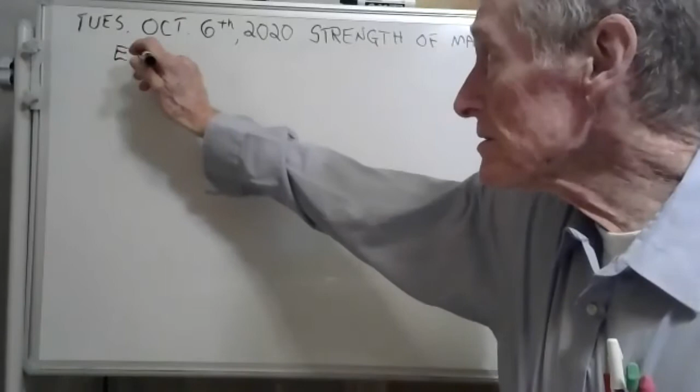Okay, your exam is on chapters 13, 14, and 15. I think we start on 15 today. I believe that's right. And let me look and see here. Yeah, I think we start on 15 today. Yeah, oh no wait a minute, that's crazy.

No. I'll get this sorted out here in just a minute. No, chapters 3, 4, and 5. Not 13, 14, and 15. Chapters 3, 4, and 5. Yeah, that's better. And it'll be available September... well, not September. It'll be available October 15th.

It's available, and it's due Sunday, October 18th, over chapters 3, 4, 5, and we start 5 today. Yeah, now Darren, did that answer your question? Yes sir, thank you. Great.

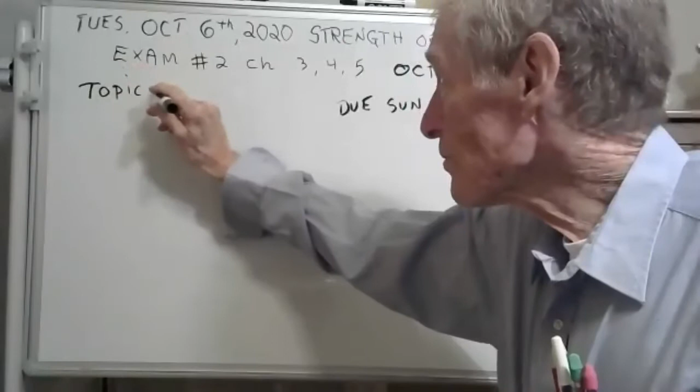But we're going to study chapter 5. Today the topic is torsion. Is that what they say chapter 5 is? Let's look up chapter 5 and see what it says here. Yeah, how about that, that's the name of the chapter, torsion.

Be nice to know what torsion is. All it is is just an external twisting. It's an external moment, and that causes a body to twist through an angle.

See, torsion is external, and torque is internal. Torsion is external, torque is internal.

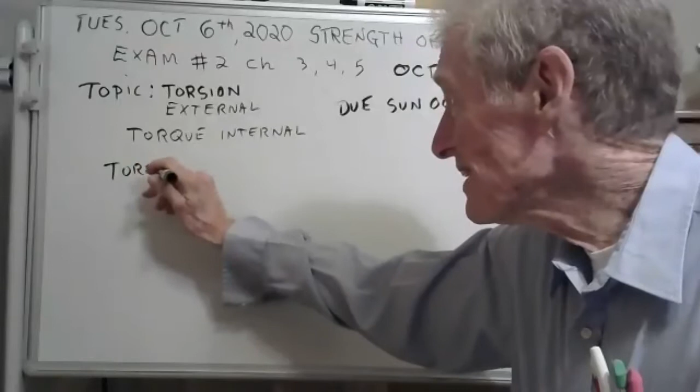Probably the most important equation in our chapter is called the torsion formula, and I'll show you where it comes from here in a minute. And it goes like this. And I'll try to explain what those different symbols mean.

Of course, you know what that little tau stands for. Here, let me ask one of my excellent students. How about my friend Samuel? Unmute and say hello, please. Earth calling Samuel, come in Samuel. Hello, hello. Hey Samuel, what's that little Greek letter tau represent? Shear stress, he's got it, he has got it, that is shear stress.

And Samuel knows that this whole course is all about stress. Stress is where it's at. It's the most important concept because, see, stress causes things to fail. Stress causes problems, and this is called shear stress.

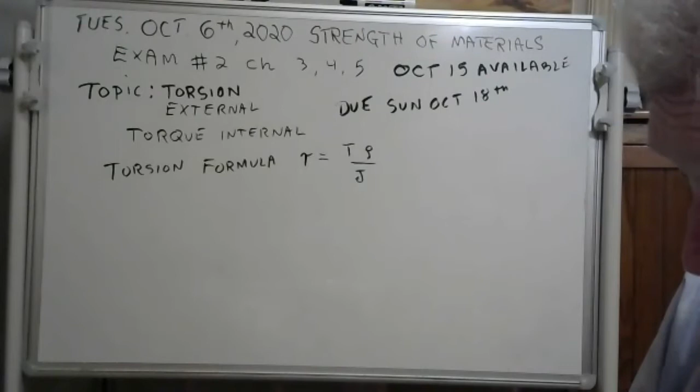And it's equal to torque times this little Greek letter rho, which represents the distance from your centroid, or you could think of it as your center of mass of your body. And this thing here is called your polar moment of inertia, but we'll get to that in a little while.

So that's for sure one of the big concepts that we're going to study. But let's see how we can get at this torque here. Let me find you an example of torque. Let me shop around here.

Okay, well here's one here. This will work. This is problem 5-7. Let me make a little room here.

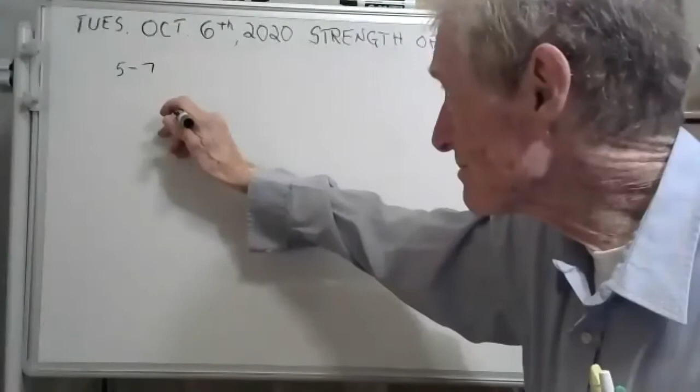But this is 5-7, and they've got a circular rod here, and it has, looks like, some gears actually. These are gears, and they represent an external torsion. There's an external torsion on those two gears going like that. This one's 300 Newton meters. This one is an external torsion of 600 Newton meters.

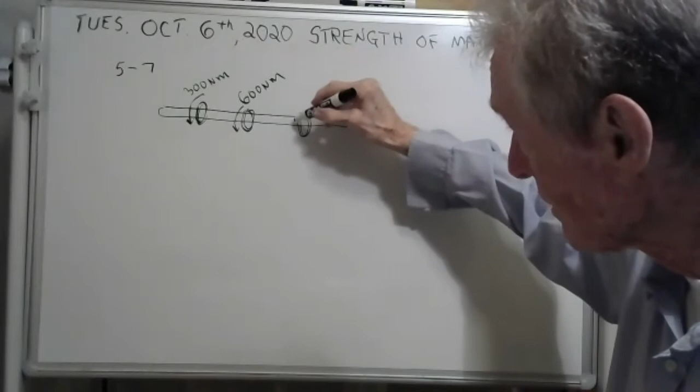Now this one, it looks like another gear right there. It's going the other way. They didn't tell you what it was. Just a minute, let me read this.

Shear stress in the shaft, determine the radial line. Oh yeah, they told us that T1 is 2,000 Newton meters. And then finally, there's another gear here, and it's got 900 Newton meters. But see, this is connected to a fixed connection, and it can provide an external torsion.

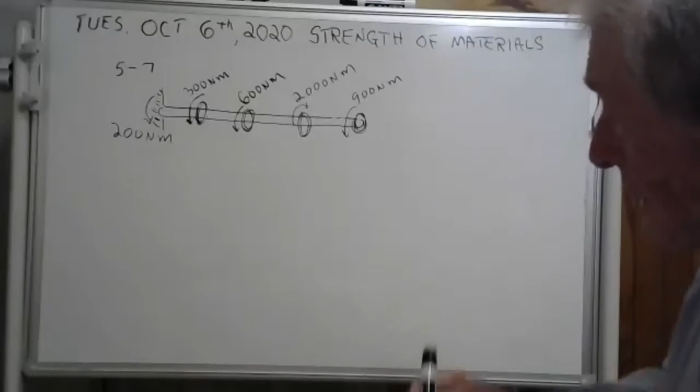Gee, I don't know, my brain is mush. I'm going to add them up. 200 and 300 and 600 and 900. Yeah, yeah, we have equilibrium. See, these aren't forces though, they're twists, they're moments. See, the sum of the moments have to be 0.

Now they call these things torsions. See, torsions are external. But see, in the torsion formula, the shear stress is given, maybe you don't understand that formula yet, but you will. It's given by the torque. We've got to get the torques.

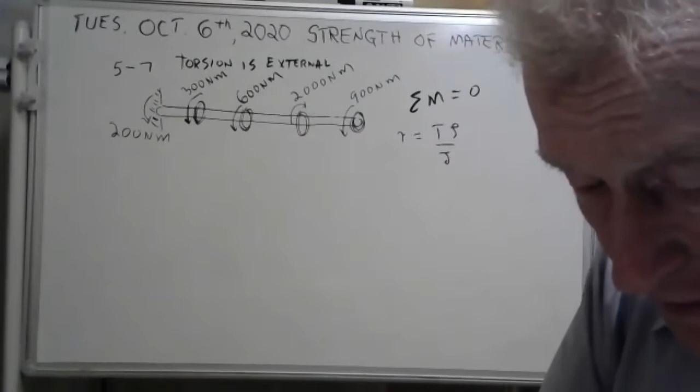Now, I've got a better way of expressing these torsions, and that's using double arrowheads. I don't think the book does that. But see, if you twist something that way, you're going to have a double arrowhead going to the right of 200 Newton meters. Now if you twist something that, well that's the same deal. This is going to have a double arrowhead going to the right.

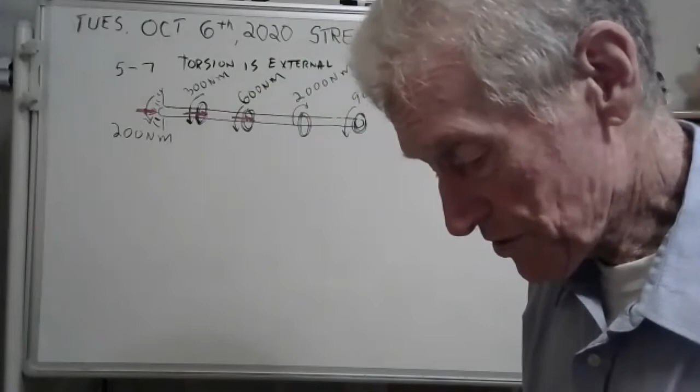And this one too, holy cow, all three of those, they've got a double arrowhead going to the right. But now this one, see, if you want to know which way it goes, just think of a right-hand screw. You know, righty-tighty, lefty-loosey, right? See, if you take and you turn a right-hand screw like that, it will travel that way.

See, so this one's got a double arrowhead going to the left of 2,000. Now this one, we're back to a double arrowhead of 900 going to the right. Okay, well do you understand that this is a superior way of doing these torsions?

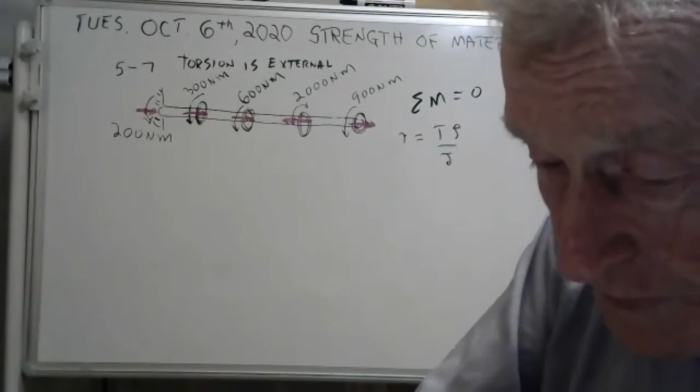We're using double arrowheads, and now we can do our torque loading diagram. This is going to be the torque loading diagram. And remember now, torque is, it's not external, it's internal. And so we're going to do the torque loading diagram. Okay, and this will be torque, and this will just be an x coordinate going to the right.

And like with all loading diagrams, what you do is the same thing we did with the normal force. To make a loading diagram, they're all alike.

They're all alike. Let me go to one of my excellent students here. How about we pick on Mohammed? Mohammed, unmute and say hello, please. Hello, Mr. Griffin. Hello, Mohammed.

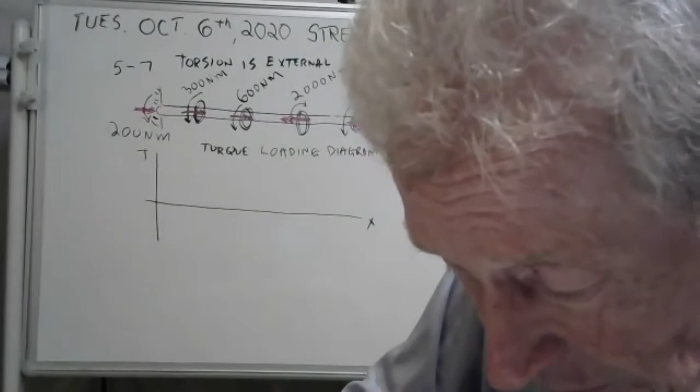Mohammed, do you remember how to make loading diagrams? What do you have to do to make a loading diagram, Mohammed? Normal loading diagrams, we cut the beams into sections and find the internal forces.

Mohammed's got it. You have to make a section. Now, the agreement is you always do a left-hand section. So see, you sectioned it in here. Here we go, forget about everything to the right because we're just looking at that left-hand section. Can you see that you're going to have a double arrowhead going to the left there of 200? So I'm going to make it 200 negative because it's going to the left.

Now we're going to section it in here. Can you see you got 200 and 300 going to the right? So you're going to have 500 going to the left. This jumps down to 500. There, negative 500 Newton meters.

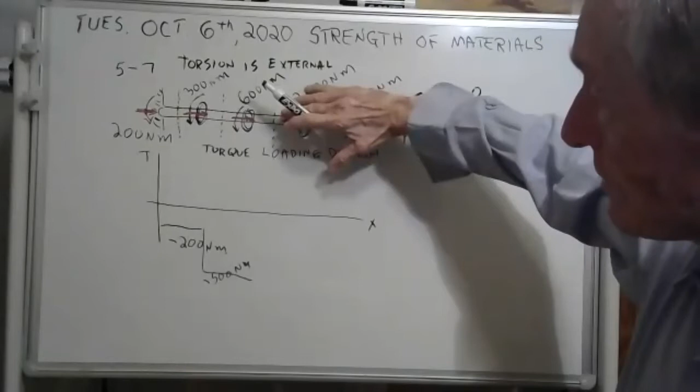Now we're going to section it in here. And you got a 200 going to the right, 300 going to the right, 600 going to the right. That makes 1100. You've got to have 1100 going to the left.

So it goes down to here, way down there, way down low. Does that even show up? Yeah, that shows up. Okay, that's negative 1100 Newton meters.

See, we're plotting torque. This is called a torque loading diagram. And then what do we do? Well, if you sectioned it in here, we've got 1100 going to the right, 2000 going to the left.

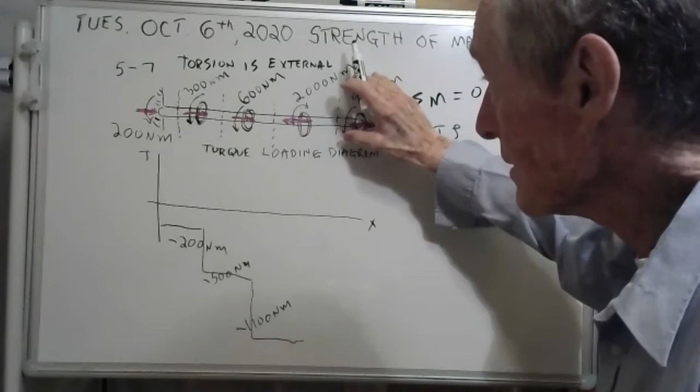I'm going to section it in here. I've got 500, 1100 going to the right, and 2000 going to the left. So that's a total of 900 that I need going to the right, a total of 900. So that means in here you've got to have 900 going to the left.

So this pops up to 900, right about here. And that's a negative 900 Newton meters. Is that right? Let me think about it. Wouldn't that be a positive 900?

Yeah, you're absolutely right. Now, who said that? Where'd that voice come from? Ben Harris. We'll give Ben a nice big fat thank you point.

We got to travel up 2000, Ben, and that puts us all the way up to about like that. I was wrong. This is a positive 900 Newton meters. And now, to make it pretty, we can color it in, make ourselves a nice torque loading

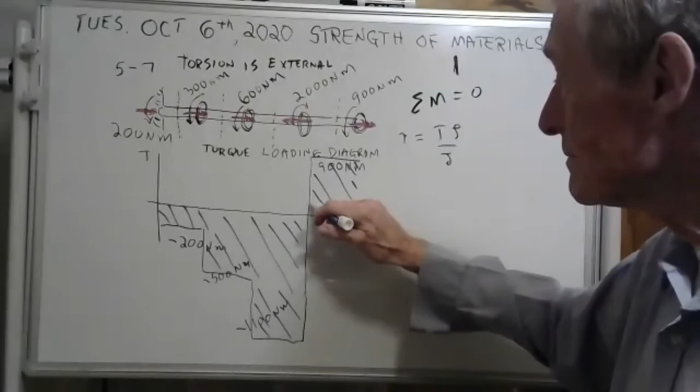diagram. We'll make it pretty. Ta-da! You're looking at it. You're looking at a nice torque loading diagram. See that right there? That's torque, that's internal.

These red things here, these are torsions. They're external. My students can get confused on this, like for instance, you look here and see a 300 Newton meter and think, well I bet that's what I need in this equation, 300 Newton meters. There is no 300 Newton meter anywhere on this diagram, is there? Nope. You see that 600 Newton meters? There's no 600 Newton meters on this diagram either, is there? No.

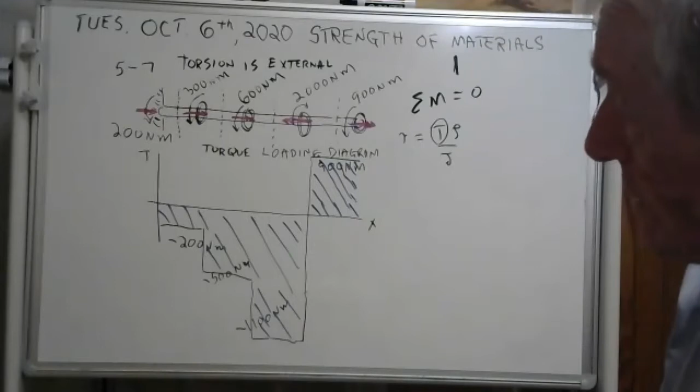So that's how you do it. It's exactly the same process that you use with your normal force loading diagrams. Did you know there are 4 kinds of loading diagrams?

Is there any question on any of that? You're okay with it? All right, well here, I'm going to list the 4 kinds of loading diagrams. Did you know there are 4 kinds of loading diagrams?

Now, on your homework, if you don't do the loading diagram, what's going to happen to you? You don't get a 4. That's what happens to you. I want the loading diagram.

Now let me go to one of my excellent students. I'm going to go to Julian. Hey Julian, unmute and say hello.

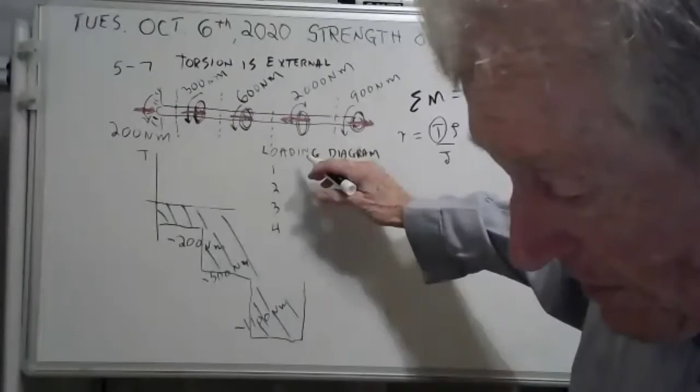Hello. Hey Julian, do you know any of the different names for the loading diagrams? Give me some, go ahead. I'll write them in here. Julian, go. Ooh, torque, yeah there's one. There's good going, Julian. Crazy, good going. There's a torque loading diagram.

Julian, can you do another one? Shear, there's a shear loading diagram. Excellent, I think Julian maybe has been listening to me. Give me another one.

Uh-oh, we're drawing a blank here. Is there? There's 2 more. Isn't it funny when you're asked something, your mind just goes blank? Yeah, I don't think I can think of the other 2.

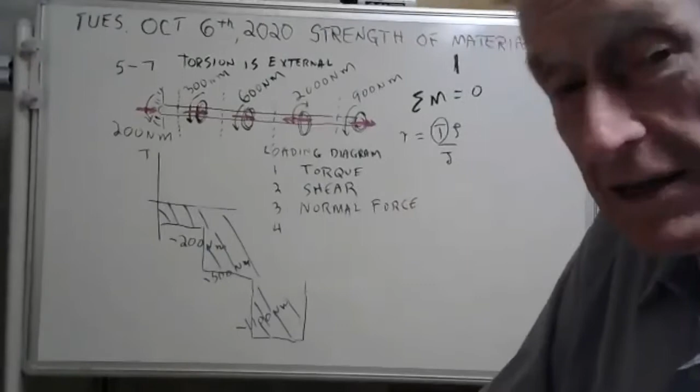Well, you've done some. There's one called a normal force loading diagram. Now, can you think of the last one? No. That's all right, you're not alone. There's some others out there. That's why I ask you this stuff. It's called the bending moment loading diagram. There's 4 kinds of loading diagrams.

Now, you've done these normal force loading diagrams, but these torque loading diagrams might be new to you. But good going. Okay, well let's attack this torsion formula, shall we? Any comments or questions from anyone?

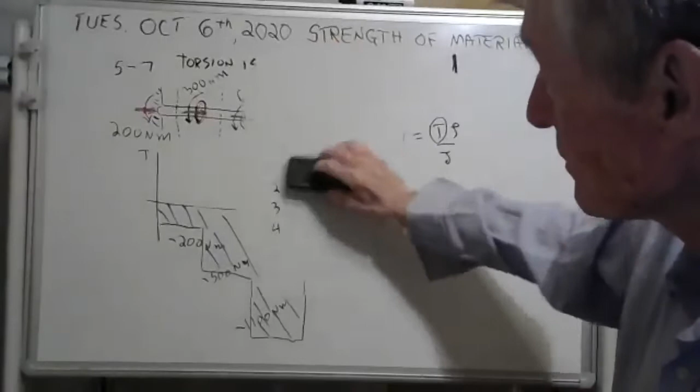Okay, now the topic is this, probably the most important equation in the chapter. We're in chapter 5, and the topic is torsion.

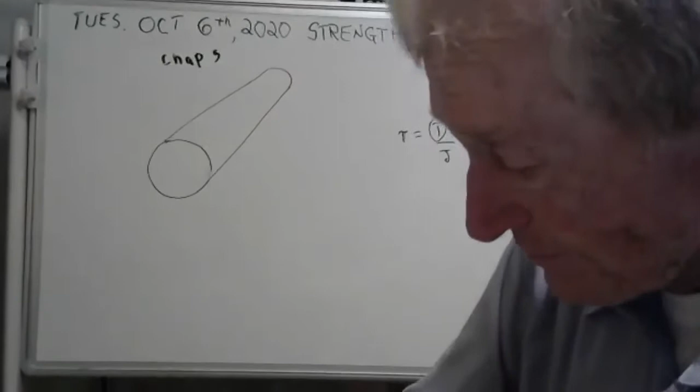Let's say you had a rod, okay? We're looking at the cross section here, and this rod goes way back here someplace. And let's say somebody is going to twist it. First, before we twist it, let's put a stripe right down the middle. There we go.

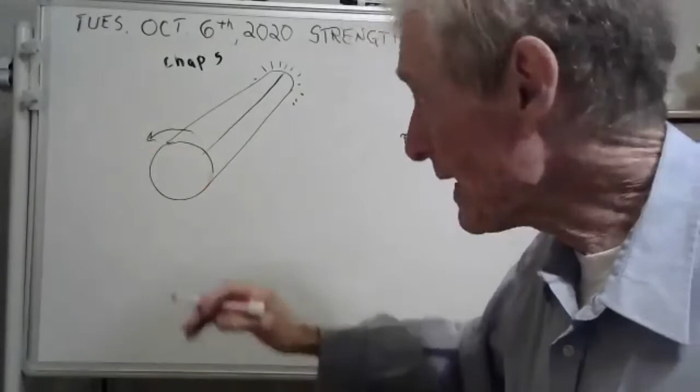Now we're going to twist it. Somebody's going to come along and put some torsion on it like that, twist it like that. Of course, this other end needs to be attached to a wall or something where it can't turn—it's going to stay put. But another way of writing that is with a double arrowhead instead of writing the torsion like that.

But where do I put my arrowhead? Let me go to one of my excellent students here. Shane, unmute and say hello, Shane, please. Earth calling Shane, come in Shane. Uh-oh, maybe coffee break. Samuel, unmute and say hello, Samuel.

Hello, Samuel, I need to put a double arrowhead on that. Can you tell that's a red? Yeah, you can sort of tell it's red, isn't it, Samuel? Now, Samuel, where do I put my double arrowhead? Which end do I put my double arrowhead on, Samuel? Like coming out of the board. Yes, good going, Samuel's got it. By Jove, he's got it.

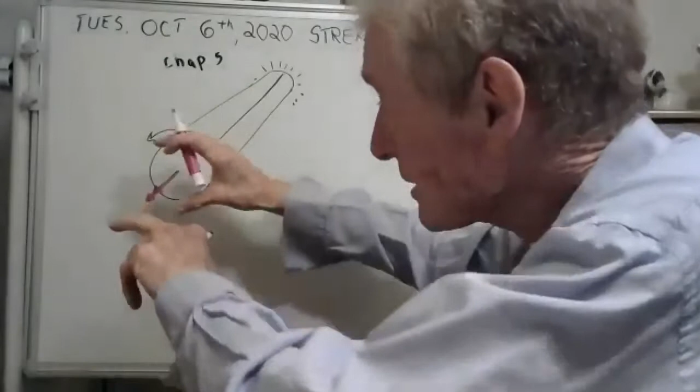See, if you twist something like that, well, what do they call that? Counterclockwise. If you had a screw or a bolt or a nut, if you twist it like that, it comes out. It's lefty loosey, righty tighty, isn't that how it goes? And if you twist it this way, the right hand rule or a right hand screw will come out of the board. So there you have it.

Good going, and here's what's going to happen. This line here that I drew along my rod, it's going to kind of move over a little bit. It probably doesn't curve like this—let me try that again. It's going to come over here like, yeah, maybe like that. Yeah, there you go, that kind of makes sense.

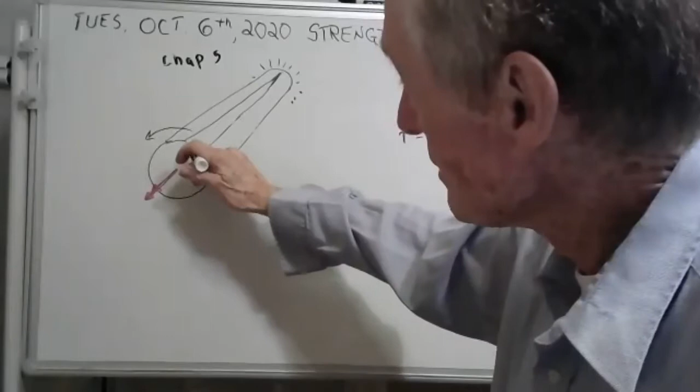If you twist it, that line that I drew on there to start with has been kind of shifted over a little bit. And this distance right here is equal to—if you said this distance here is a radius, or in this case we'll call it rho, and it's an angle theta there. Maybe d theta, or I guess theta—make it theta, there you go. This little distance here is rho times theta.

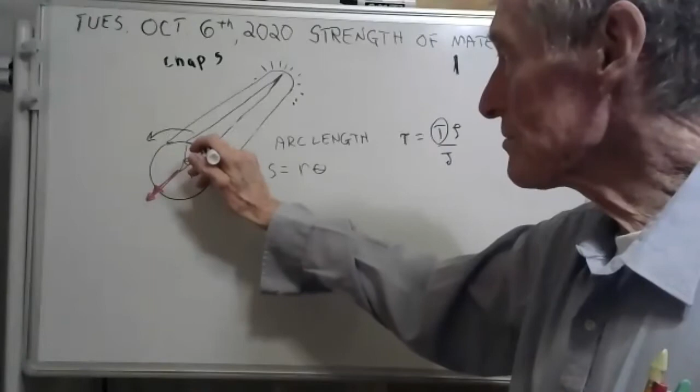Remember, what do they call that? The arc length, a formula that we all know and love. You can make that an R if you wanted to, but it's that little distance there, S we could call it, from here to here, that it's been moved, is equal to r theta. S equals r theta, that's the arc length formula.

If you call this distance x going this way, then the normal strain—remember, normal strain is deformation over length. So is shear strain; shear strain is deformation over length. But the difference is, with normal strain, these are parallel. The deformation and the length are parallel.

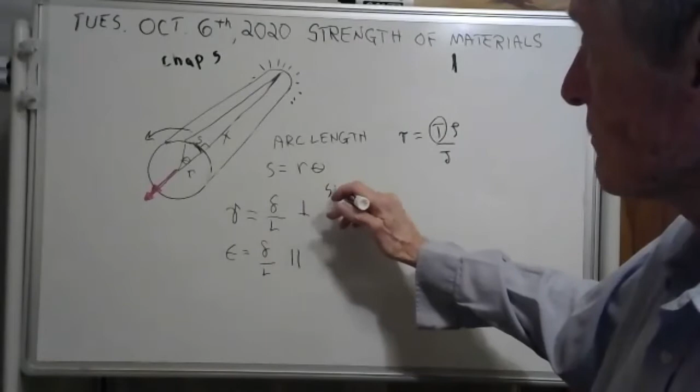But with shear strain, the name of that is a Greek letter gamma. It's shear strain—the deformation and the length are perpendicular. See, these are perpendicular. Here's your length, x, and here's your deformation. There's a perpendicular here, I'll draw it for you. There you go, see the little perpendicular in there. Those are perpendicular, whereas these are parallel. So the shear strain, here, I'll write it out for you. It's called shear strain.

We've studied shear strain before, there's a formula for it. It's a form of Hooke's law, where this is your shear stress, this is your modulus of rigidity, and that's your shear strain. Just like this formula here is another form of Hooke's law, where this is normal stress, modulus of elasticity, and normal strain.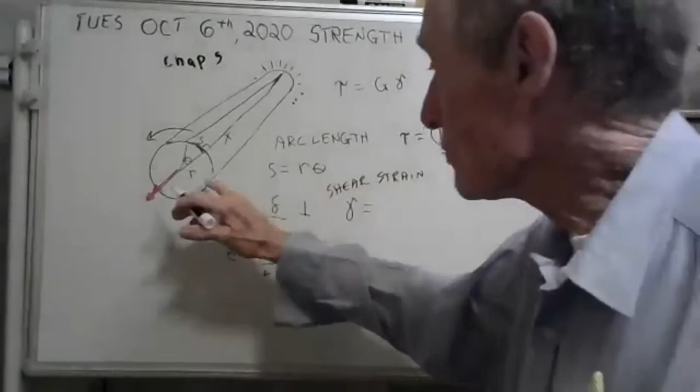Right, we know that. Well, we could just write this as... I think the way they write it is, rho can be any distance in here from the center to whatever point you want to talk about. If you go all the way to the end there, that would be the radius. But this would be rho d theta dx. That's your shear strain, rho d theta dx. Now let me see if that's in your book or if I'm making this stuff up.

Let me dig around and see here. We're in chapter 5, for anybody that just tuned in and wonders what we're doing now. I see that equation, it's on page 185. Only they use the symbol phi instead of theta. That's okay, it's just a dummy variable. They said d phi. There you go. Yeah, that equation is on page 185.

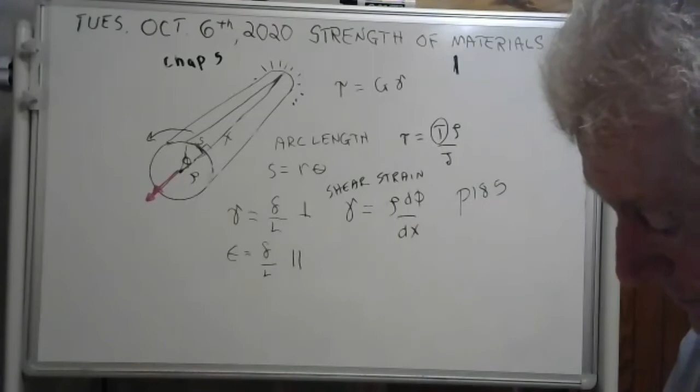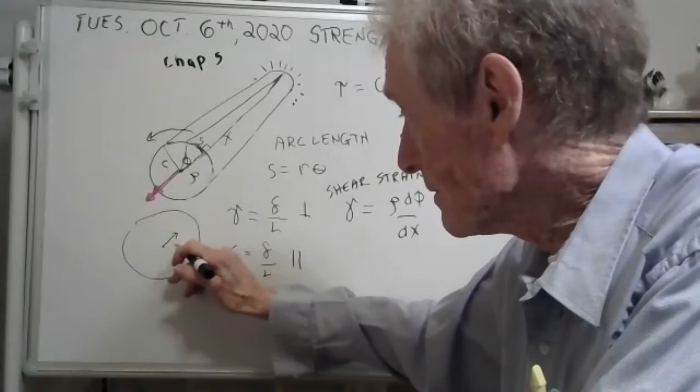Now in this book, this would be the radius of your rod that you're twisting, and they decided to call that C. So let's not get confused. C is the maximum distance from the centroid or the center of your rod to the outside. Now rho is any distance - like if you only went halfway to the outside, maybe from here to here, there's your rho. Rho is just the distance from the center of your rod to wherever you want to talk about. But C would be the maximum, from the center to the outside.

When we develop this equation here in a little while, you'll discover that if rho is 0, there is no stress. If rho is 0, there is no strain. Did you know if you twist a rod like that, there's no stress or strain at the very center?

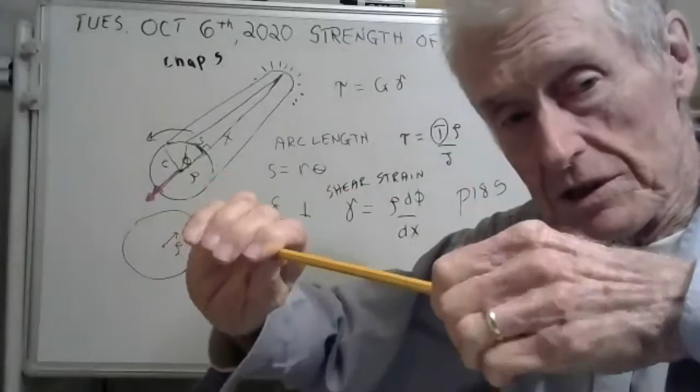I've got a pencil here. Now I'm not going to break my nice pencil, but I could take this pencil and twist it. It won't break at the middle. It's going to break on the outside because on the outside the rho is bigger. It turns out that you get your maximum here on the outside, that's where you get your maximum stress. Of course, you get your maximum strain too - as you turn it, the strain is bigger on the outside. You get your own pencil and break it. Take your own pencil, twist it, and you'll discover it'll start to splinter on the outside. Go wreck your own pencils. Okay.

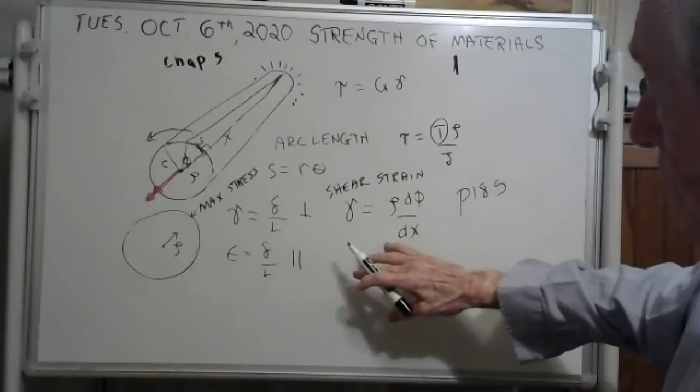Well, so far so good. We've come up with this equation here now. Now let's see if we can continue on. We're about a third of the way through showing you the torsion formula - that's what we're studying right now, the torsion formula. And we showed you that. I need a little room here to work now.

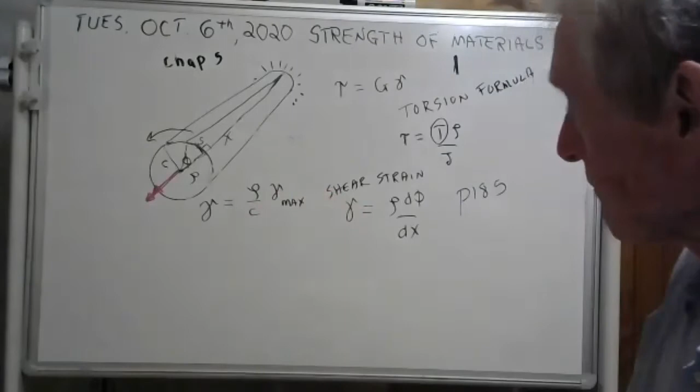Now, what they said on page 185 is you could write the shear strain like this. This d phi dx is really going to be a constant - it's how much you twisted the rod. Once you've twisted it, keep it twisted like that, that's really a constant. But the shear strain depends on your rho, it depends on your distance from the center - that's called a Greek letter rho, R-H-O. So what they did was, if you know what the maximum strain is, which is on the outside, and you multiply by rho over c, you'll get your shear strain at any point inside your piece. See, if rho is equal to c, you have the maximum. If rho is equal to 0, you don't have any strain at all.

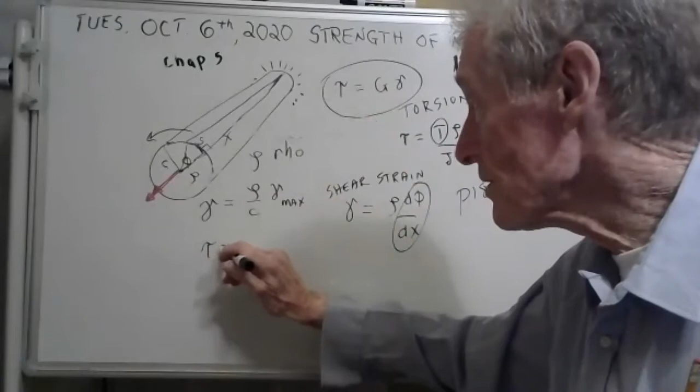So there's a nice little equation for strain. Now, if you go back and stare at this equation for a minute, which is Hooke's law, then we can write this equation here. Because stress is directly proportional to strain, we can write the formula for shear stress as being directly proportional to the distance from the center, just like shear strain is. If you understand that, we're getting towards the end of our torsion formula, and we'll have it. This equation you'll find on page 186. Okay, now we're ready to find the total torque acting on a piece like this. Now that we have this equation, let me make some room here and we'll do it here someplace.

If you don't follow this, at least you've seen it and have an idea of where it came from. The main thing is to be able to use it, to understand it.

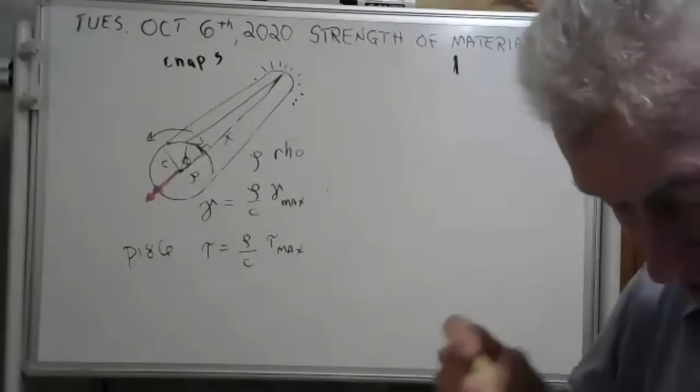What we're going to do is find the total torque, which is internal inside your piece. Remember a little while ago we found the torque on that problem—I forget the number—and we had to do it. Muhammad knew how to do it. You had to take sections to get at it.

But here's our plan. We're going to take and add up all the little itty bitty torques on a cross section. Now, here's the plan.

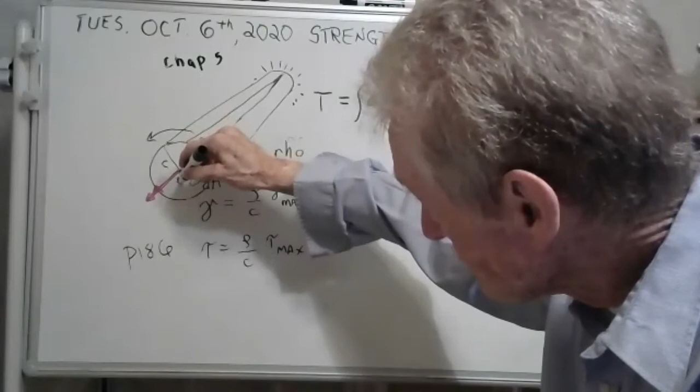Take a little area here, call it dA. That's a nice name for it—it's just a little chunk of area. Now it's at a distance rho, and that little area is going to have a shear force on it. I'm going to call that dV.

And you all know about moments. A torque is just a moment. The torque on that little piece there is going to be rho dV. I hope that makes sense—it's distance times force, that's what a moment is. And if you add them all up, you get the total torque.

Well, this shear force—I think that shear force is equal to your shear stress times your area. That small amount of shear force is your stress times your area.

So why don't we write that: shear stress times your area. Have I fouled up yet? No, I don't think so. I think I've forgot my rho though. Now I think I'm okay.

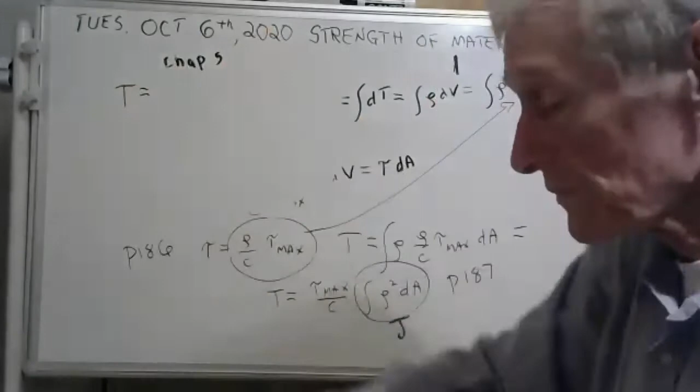Now we're going to call this—we're going to give it a special name. We're going to call it J. We can call it anything we want to, but we're just going to call that thing J. So what we have is the total torque acting on a body, say a rod that you're twisting, is equal to this times J.

Yeah, okay, it's got a name. It's called the second moment of area, if you really want to know—that's the name of it. It's also got a fancy name: it's called the polar moment of inertia. But we'll talk about that here in a minute.

Now, see if you can do a little algebra with me and get to here. Were you able to get from here to here? Were you able to make it?

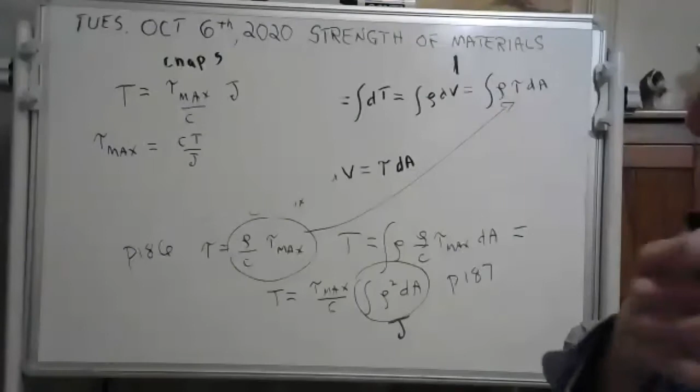Okay, great. Now, do you see this equation down here that we all understood a little while ago? What I'm going to do is substitute that tau max in this equation. Did you follow that? All I did was I took this. I got lost now—what did I do? I took, oh okay, here we go.

You see that tau max? I stuck that down in here is what I did. And if you do that, well, this is what you get. Hey, look at here—those little C's go bye-bye, don't they? And here's what you have left.

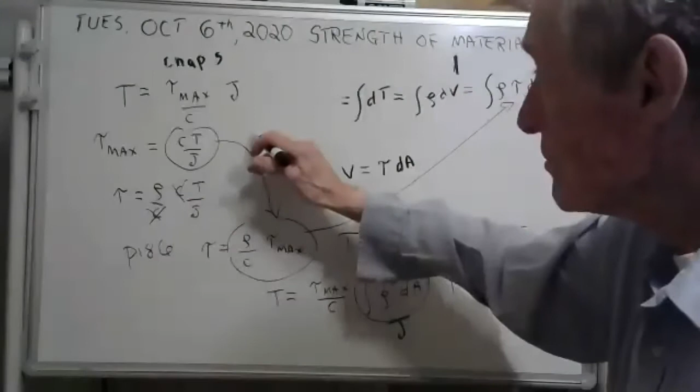You have left the shear stress on a torsion member is equal to T rho over J. That's it. That's the most important equation in the chapter, and it's got a name—it's called the torsion formula. Ta-da, there it is. Now let's see if we can work a problem with it.

Okay, let me find one here that looks interesting.

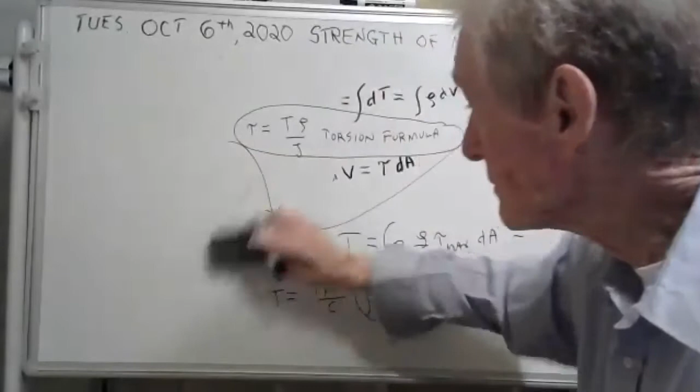This is problem F5-5. Let's do it. I need some room. We have our torsion formula, and we're going to do a problem now. I forgot to ask if anybody had any questions. Does anybody have any questions? Okay.

Well, this is problem F5-5. It's a fundamental problem. Help me find it here. I lost my page. F5-5. I can't find it. I'm still looking. Hey, I found it. It's on page 198.

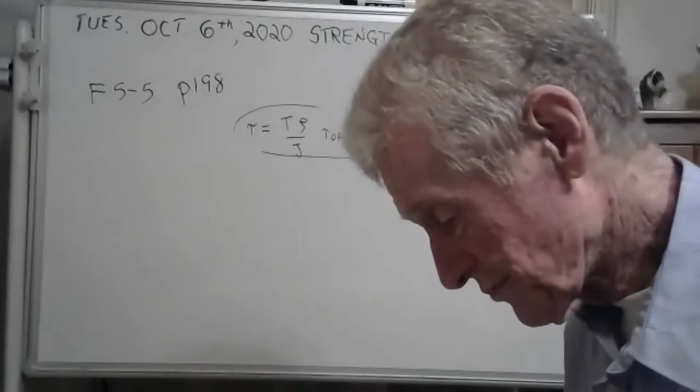Okay, well, they have a shaft that's got some external torsions on it, all right. Here, let me draw it.

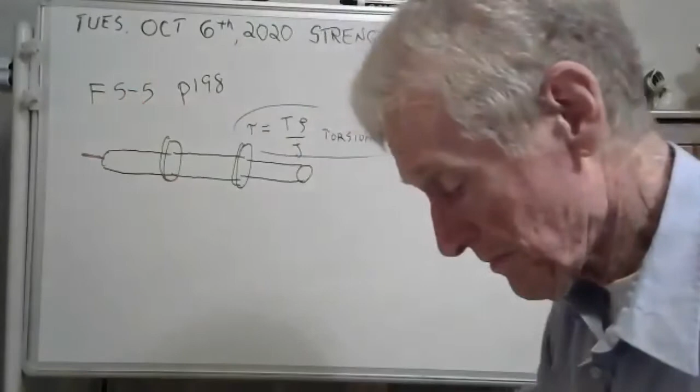There's this shaft. I'm just going to go ahead and use the double arrow method of drawing these external torsions. Now the way they draw it is they go like that.

And I need to know which end of that external torsion I put my double arrowhead on. Let me go to one of my students here. Jackson, unmute and say hello, please. Hey, Jackson, they've got, the way they write these external torsions is like that. They're twisting it like that. Which end do I put my double arrowhead on, Jackson? You put it on the right end. You guys are good.

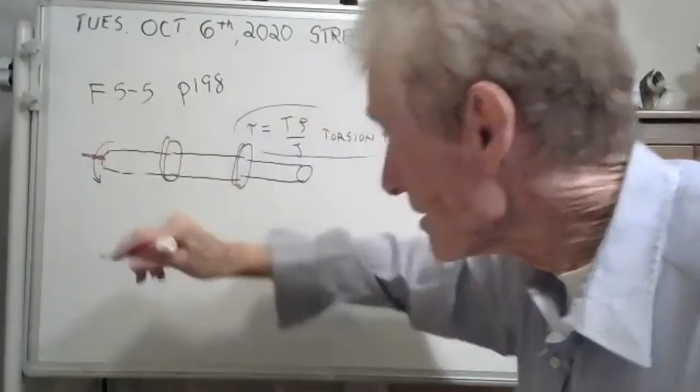See, if you take a right-hand screw and you turn it like that, it goes to the right. Let me show you that again. If you twist a bolt or a screw, right-hand screw, and you turn it like that, it goes to the right. So Jackson's right. Okay, well, let's do the rest of it here.

I got lost here. Oh, there's another one here, and it's going to the right also. Ah, but then there's one here that's going to the left. And finally, this one's going to the right. Now, if I got any of those wrong, somebody speak up and tell me.

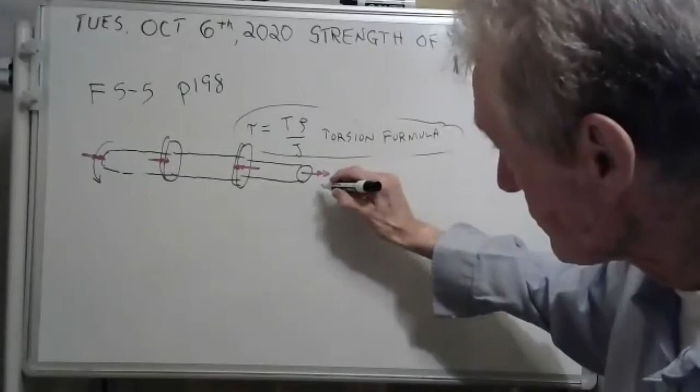And here's the numbers. This is 600 Newton meters. This one is 1500 Newton meters. See, these are moments. They're twists. They're called torsions. They're external. This one's 1500 Newton meters, and this one's 600. Now, first of all, let's make sure that the sum of all the moments is 0.

2100. Wait a minute here. I don't think they add up to 0. There's something wrong here. 600 and 1500. That makes 2100, right? No? Wait a minute, guys. That doesn't add up to 0, does it? Something horribly wrong here.

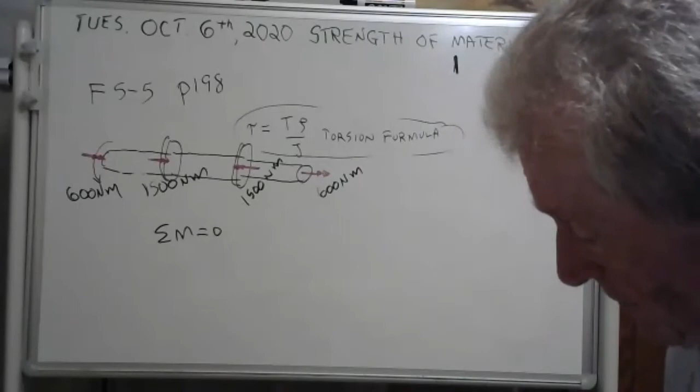The book might have made a mistake here. Is the 600 on the very right supposed to be pointing to the left? You know what? I bet you they goofed up. They did. The book made a mistake, guys.

They got it going the wrong way. This thing should be going that other way, and this double arrowhead is going to the left. Now, I think it works. The 600 and 1500 make 2100. Oh, yeah. 600, 1500, yeah. It works now. Make a note in your book. It's a pretty good book, but this is wrong. It's going the other way.

Y'all, little Southern talk. Y'all understand that? Book was wrong. It happens. Books can be wrong.

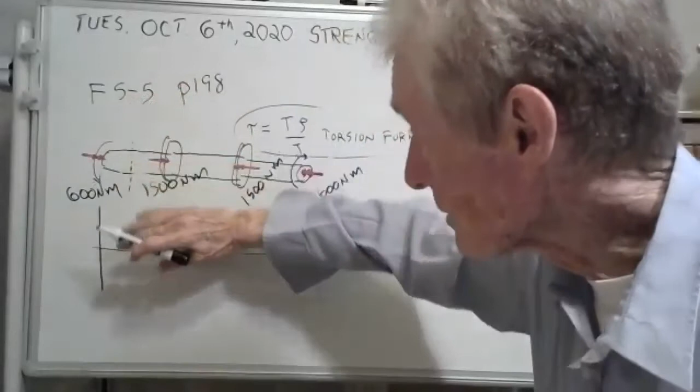Okay, now let's do our torque loading diagram. Here we go. Okay, now let's see. When you section this in here, you have to have it going to the left 600. There you go. Negative 600 Newton meters. We're doing the torque loading diagram.

And then what happens is it goes down, doesn't it? Maybe I shouldn't have made that quite so small here, or so big. Here's 600. Yeah, there's 600. It's a negative 600 Newton meters. And then it goes down all the way down to a negative 2100 Newton meters if you sectioned it in here.

And then it pops back up 1500, which brings it back to negative 600. Negative 600. And da-da, you're done. You can color that pretty if you want.

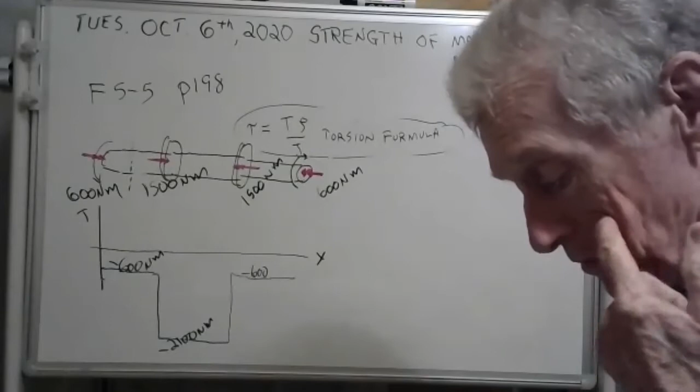And now we're going to answer their question. They wanted the maximum shear stress in the shaft. Well, we have the equation. You're looking at it. And they said...

Yeah, here we go. This in here is a pipe. It has 30 and 40 millimeter radii. This here is, I like meters, 0.03, and this here is 0.04, right? Isn't that what they said? Yeah, yeah. Okay, now we need to develop these formulas for this thing here.

The fancy name for that is the polar moment of inertia.

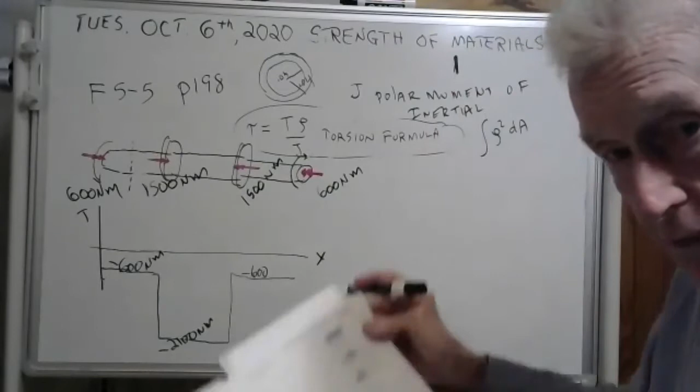I would derive the polar moment of inertia for you—remember it's the integral of rho squared dA—but we've got a table for that in the flap of your book.

You have to know how to use it though. For a circular shape, the table gives Ix as 1/4 pi r to the fourth, and Iy as 1/4 pi r to the fourth. If you add these, you get the polar moment of inertia, also called Iz, which is Ix plus Iy. In this case, it's 1/2 pi r to the fourth.

So do we know what the radius is there in the middle? Yeah, I see it. Now here's the problem: you're going to have to subtract. You're going to go 1/2 pi, 0.04 to the fourth minus 0.03 to the fourth... oh, there's a thank you point, but we can't erase that. Those are too rare. I'll do it down here.

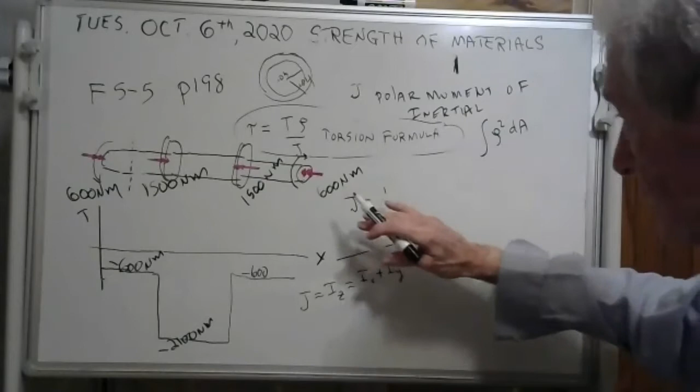Polar moment of inertia is pi over 2—isn't that what they said? Yeah, it's 1/2 pi, or pi over 2. That's fine. But you're going to have to go 0.04 squared minus 0.03 squared. And here we go, we're going to get our polar moment of inertia. Let me do it.

0.04 squared minus 0.03 squared, times pi divided by 2. I'm getting an answer of 1.09956. But what are the units? Good question. Looks like meters squared, but that can't be right.

It's not meters squared, I know what it is—it's meters to the 4th, but what am I doing wrong? Oh, I see what I'm doing wrong. Here's what I did wrong: it's to the 4th power, so this is wrong. Let me do it right.

0.04 to the 4th minus 0.03 to the fourth, times pi divided by 2. I'm getting 2.7489 times 10 to the minus 6, meters to the fourth. The polar moment of inertia is in meters to the fourth.

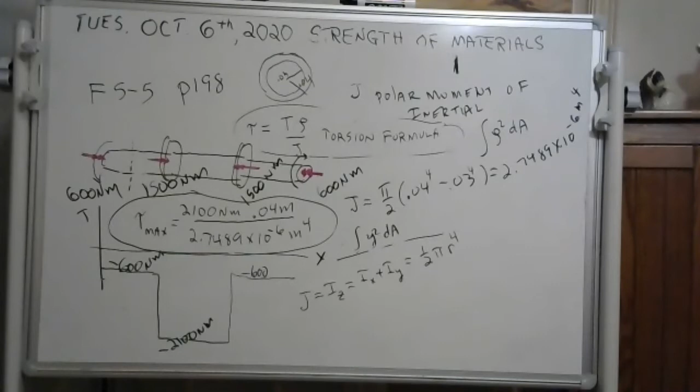Professor, I have a quick question. Why are we using newtons and meters and inches? I thought... Well, where do we have inches? You have it written for the units on the bottom. Oh, my computer screen wasn't rendering it properly, I'm sorry, it looks like it could be IN but it's actually M, meter. I can see the M now. Thank you for mentioning that, somebody else might have thought that was inches. I'll give you a little skinny thank you point.

Now the answer book says 30.6 megapascals. Let me see what I got when I did it—I got 30.558 megapascals. How about you guys, did you get that? I got that too. Yeah, we got the answer. We figured the maximum shear stress using the torsion formula. We're feeling good about this.

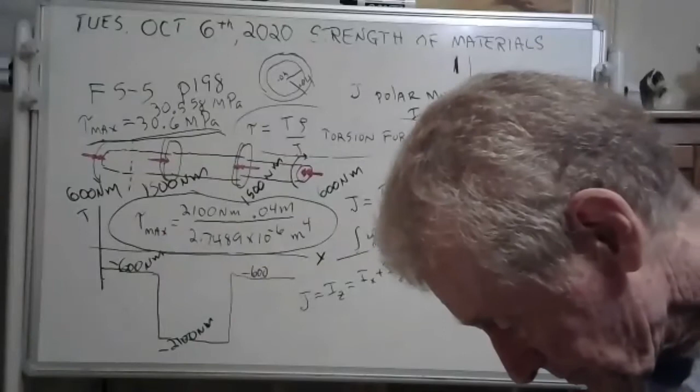Let me give you a little more theory, and then we'll work another one. This theory deals with power. Let me make some room.

So far we've talked about the torsion formula, but there's a couple of other very important formulas in this chapter. One of them is for power.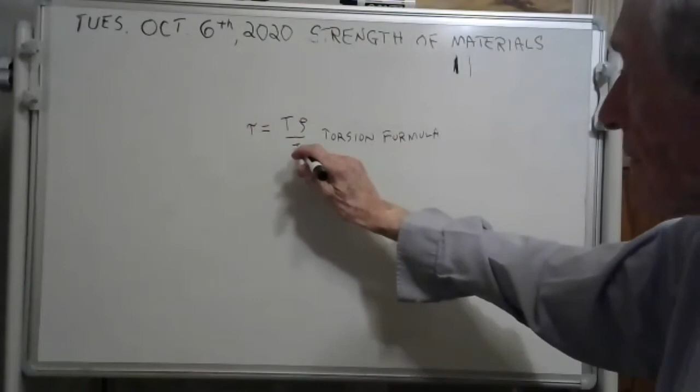And you know that power can be delivered with a drive shaft. Your car has a drive shaft. It may be a short one with front wheel drive, or if you have rear wheel drive, it's a longer drive shaft. Power can be delivered from your motor to your wheels that turn.

And the formula for rotational power is torque times your angular velocity. Now to refresh your memory, for linear power, power is force times distance, force times velocity.

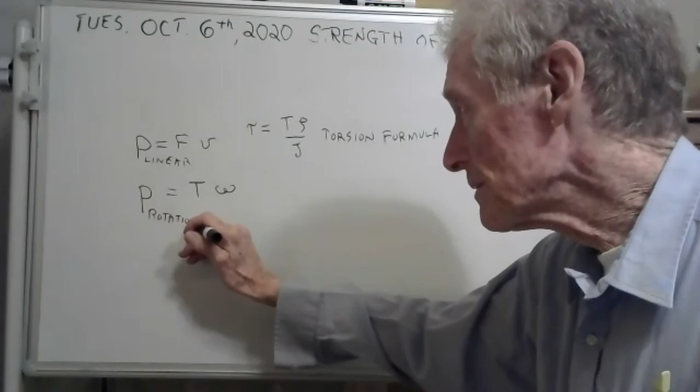Power is force times velocity. I don't know if you remember that, but that's for linear power. We are talking about rotational power. Instead of a linear force, we have a moment, a torque, which is a rotational moment. And instead of linear velocity, we have angular velocity.

Now that we have the formula for power, and this is all on page 194, you guys could read about it.

I want to work a problem now. This is problem 527. We're going to do 527 together. It's on page 203.

We have our formulas for power now, we have our torsion formula, and there's a drive shaft. You're looking at a drive shaft of an automobile.

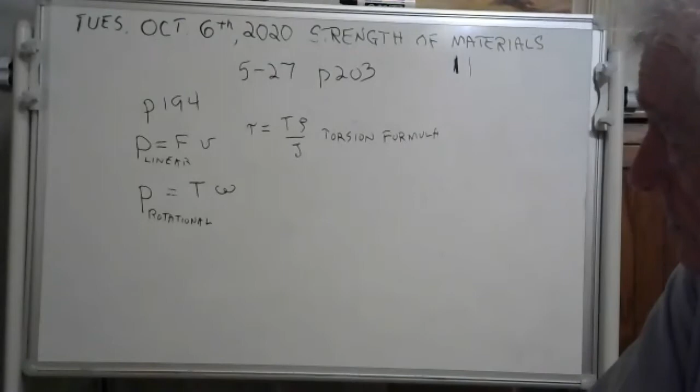It has an allowable shear stress of 8 KSI. Well, let me write some of this stuff down. The allowable shear stress, we don't want to exceed this, is 8 KSI. The outer diameter of the shaft is 2.5 inches, and the engine delivers 200 horsepower.

Let me write that down. The power is 200 horsepower. Now we're going to have to convert that to foot-pounds per second, so let's just go ahead and do that. You know that horsepower is 550 foot-pounds per second for every horsepower, so you can get rid of your horsepower that way.

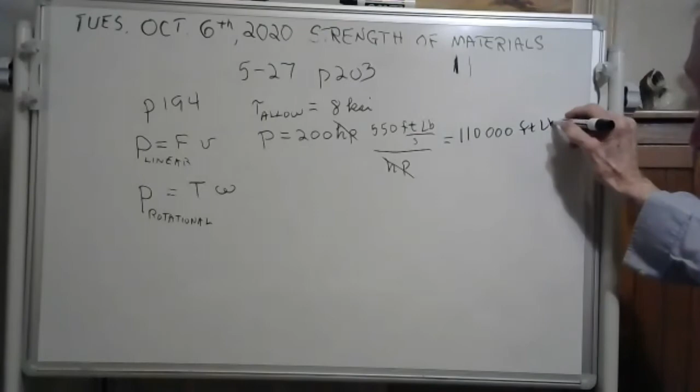And we can get the power. Let me write this down: 200 times 550. I'm getting 110,000 foot-pounds per second. That's our power.

Okay, now let me keep reading. All right, 200 horsepower, it's turning 1140 revolutions per minute. Well, that's your angular velocity. It's 1140 RPM. Now what that is, revolutions per minute.

You all know that, you probably have a tachometer in your dashboard that has RPM on it. See, what that is, revolutions per minute. Well, we don't want that.

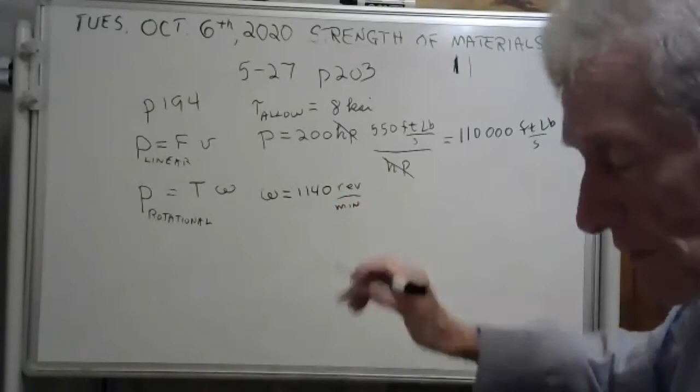We've got to have radians per second. So we're going to go 2 pi radians, which is dimensionless, for every revolution. You can write radians here if it makes you happy. And we got to get rid of the minutes. A minute is 60 seconds, so we can get rid of the minutes, we can get rid of the revolutions. Radians are dimensionless.

And here we go, we're going to get the angular velocity, they call this angular velocity. All right, here goes: 1140 times 2 times pi divided by 60. I'm getting 119.38 radians per second. Radians are dimensionless.

Okay, well, we're doing great. We have our, here's our equation, it goes like this. There it is. And the thing is, we know what this is, and we know what this is. Hey, we can solve for the torque.

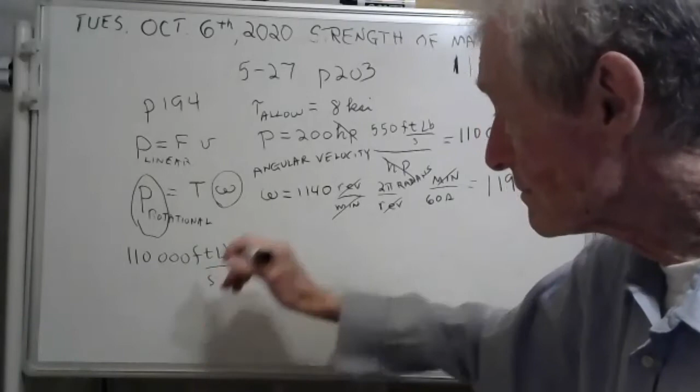Let's do it. Now, the power is 110,000 foot-pounds per second. We don't know what the torque is yet, but we got our omega, it's 119.38 radians per second.

We're doing problem 527. If you just sort of woke up from a daydream, or maybe took a coffee break, we're doing 527, and we're going to find our torque now. Get your calculators and tell me what the torque is. I'll shut up. Find the torque.

All right, I'm going to call on somebody here. Let's see. Let's see who I want here.

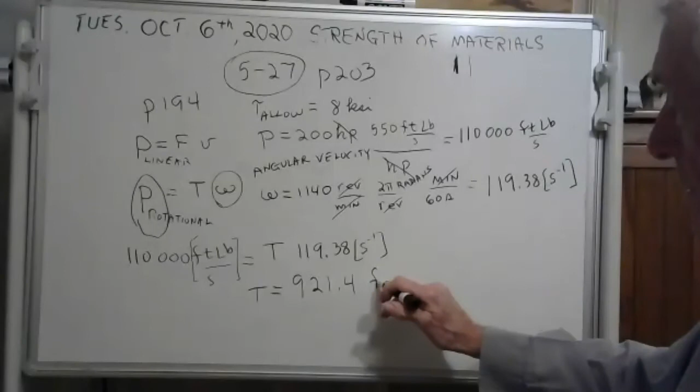921.4. Now, Brian, what are the units? Let's see, would that be, is that foot-pounds? Yeah, good going. Proud of you, good going. 921.4 foot-pounds. We did good.

Good. Now let's see what we're supposed to do here. Just a minute, let me read this. They want the minimum... determine the minimum required thickness. That's what they want. Okay.

Now this drive shaft needs some room here someplace. We're going to make some room. This drive shaft is not solid. It's not solid. And now what do we know about it?

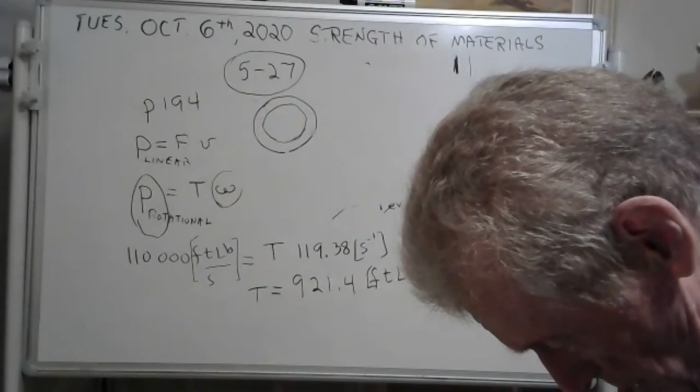Let me read this. The shaft's outer diameter is 2.5 inches. The outer diameter is 2.5 inches. I think the formula we use has radiuses or radii in it, and so that would mean that this outer radius is 1.25 inches.

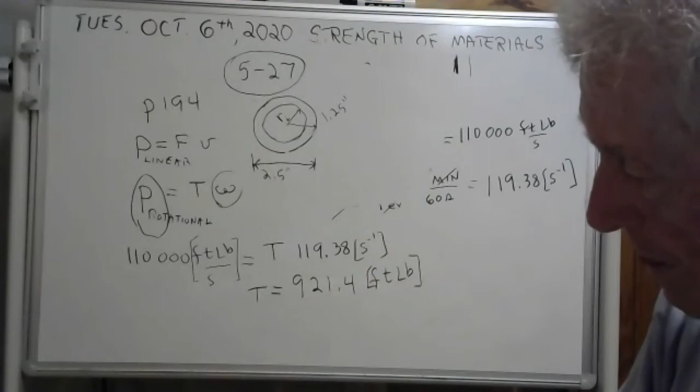And what we're going to find is this inner radius. Let's call it R sub I, for inside or inner. All right, and here comes your polar moment of inertia: pi over 2 times 1.25 inches to the fourth, minus R sub I to the fourth. There's your polar moment of inertia for this crankshaft, but we don't know what the inner radius is yet.

But we're going to find it. Here goes, we're going to find it. We're going to use the torsion formula. Now you know and love, or are starting to love, I hope, the torsion formula, and you know it goes like this.

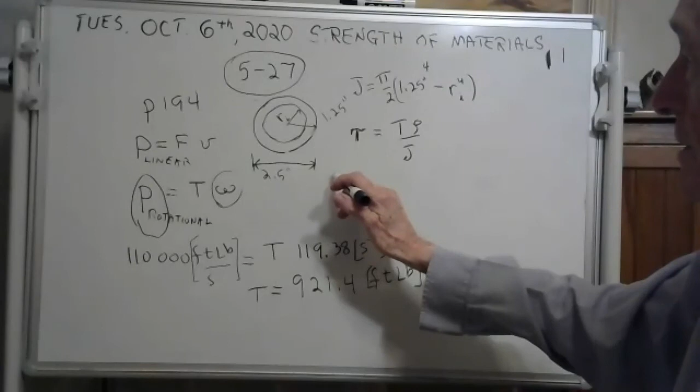I'll get it right in a minute. There you go. Okay, now they said that the maximum allowable shear stress - I erased it - is 8 KSI. So we know that that's 8 KSI.

And hey, we know the torque, look at here, it's 921.4 foot-pounds.

Now the rho - if you want the maximum possible shear stress, you want the maximum possible distance from the center, rho. So that's 1.25 inches. Now here in the denominator, you got this J thing they call the polar moment of inertia, and it's equal to this here.

Okay, now here's the tricky part. Here is the tricky part. Oh, it's so sad, we only have 4 minutes left. Have you ever noticed how fast time goes by when you're having fun?

Here's the tricky part: you got to get rid of those feet. You have to go 12 inches is a foot, and you see what that does for you is it gets rid of that foot there. And you have inches squared on the numerator and inches to the fourth in the denominator, which means you'll have pounds per square inch. That's what this is - 8 KSI, that's 8,000 pounds per square inch.

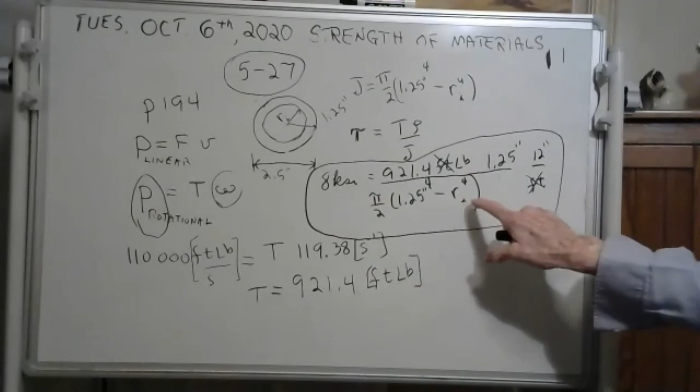Now we have an equation here, and we're going to solve it, and we're going to get our inside radius. You understand? Put that in your calculators, please, and see if you can find this inside radius. Go for it.

Well, I wish I had more time with you, but I don't. I'll tell you what I got though on my calculator - I'm not sure it's right, but I got the inside radius is 1.0762 blah blah blah inches.

That's not what they asked for. They want to know the thickness, they want to know the thickness of the wall. Now to get that, you'd have to subtract this from the 1.25 inches. If you'll subtract it, we should get the answer. Let's see if we do.

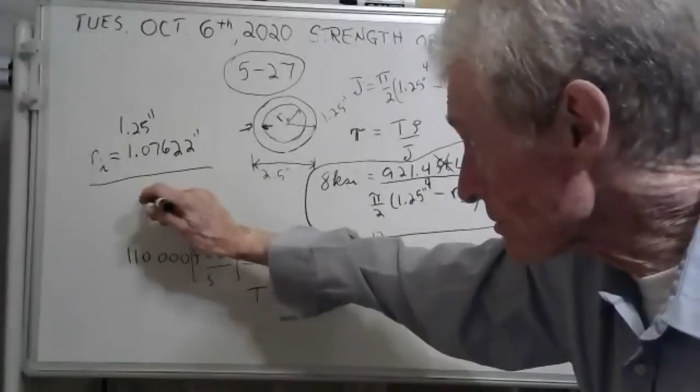Here's what you get: the thickness of the wall should be 0.1738... Now look that up in the answer book for problem 527. And they said it's 0.174. The answer book says 0.174 inches. That's how you do that problem.